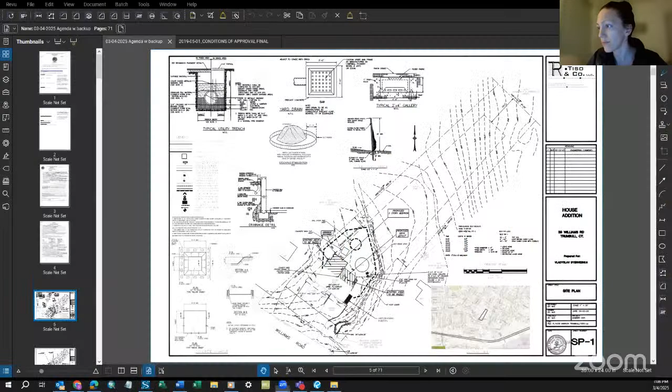Let me know if you can see it. Yeah, we can see it.

Basically, is there a watercourse? Is there wetlands? What are we dealing with here? The watercourse wraps around it. The addition is in the back of the house. As was stated, there's an existing deck. There's a line you can barely see, but it will be moved to the other side, and here is the proposed addition.

Please correct me if I'm wrong on anything. No, that's exactly as it is.

Go ahead, Tatiana. Yeah, we've issued engineering comments. They're really minor in nature, so I'm sure the engineer will address them prior to the next meeting. The only comment I wanted to highlight for the commission is that it would be beneficial if the driveway runoff was treated instead of the addition.

So the stormwater system is proposed in the back of the house. It is close to the watercourse, but roof runoff is clean, as we know, and driveway runoff - it would be beneficial if it went through the stormwater system instead of the addition. It is not a requirement, it's up to the applicant, but I just wanted to highlight that it would be beneficial for the wetlands.

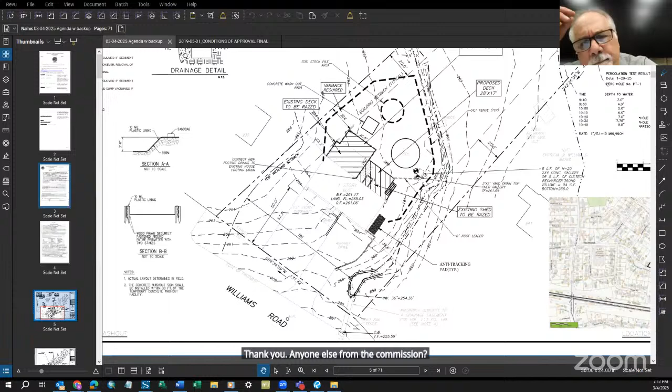Anyone else from the commission? Through the chair, go ahead Carmine. More of a question for Tatiana - there's just that one 6-inch roof leader. Is that just for the addition, or does he have to tie in the whole house to the Cultech? It says it's just for the addition.

They don't have to tie in the whole house. It's just the added impervious area that has to be routed to the stormwater system. Okay, thank you. Any other commissioners, any questions?

Okay John, I'm going to ask you to inform the applicant of what we'd like to have done for our walk, if you would.

John, are you with me? I'm sorry Richard, okay, I wasn't prepared for that. No problem, I thought you were talking about John Mayer. Yeah, so we haven't - I'm up, sorry, I forget we have the two Johns. Yeah, he's the talkative one, I forget.

So we haven't done any new construction, right? So we would probably like to get the corners of the building, or the addition, staked out. So if we could have at least 3 points on the back side of the house identified with stakes, I think that would suffice. I don't know if any other commissioners have any ideas on what else.

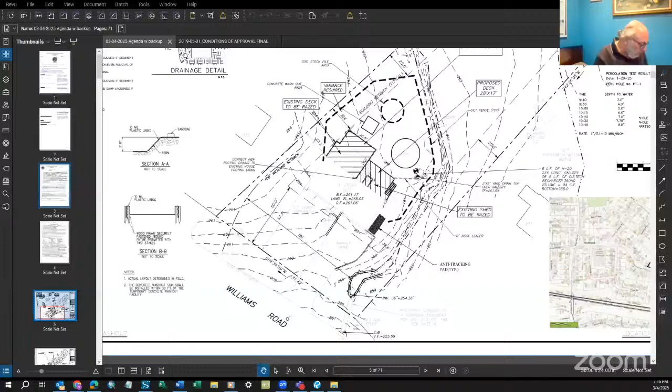Any other questions through the comments? Go ahead, Carmine. It's another technical question. In the drawings, there's a drawing C1 and C2, and they seem to be the same. Is there a difference in those?

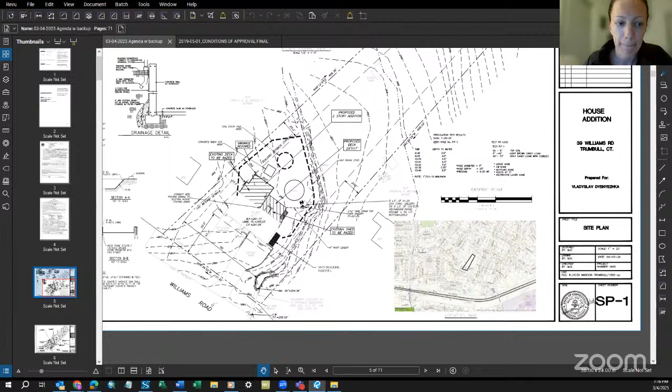C2 just depicts drainage area maps. This is really relevant for the drainage calculations report, so it wasn't necessary to include that. I would just concentrate on SP1. But C2 really depicts the information for the drainage calculations, so time of concentration, curve numbers, all that stuff we review as part of the stormwater system design.

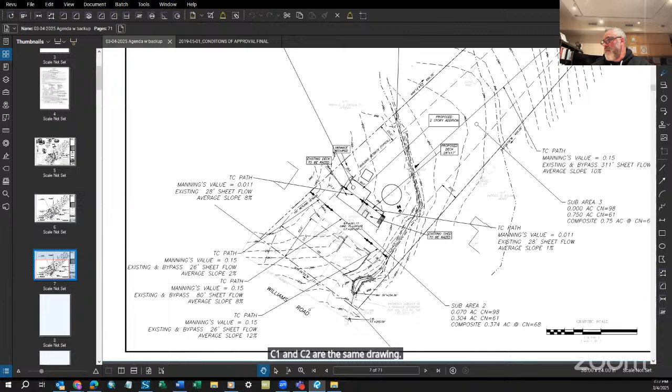So those calculations seem to be on both drawings? Yeah, it looks like both are the same. I agree. I don't see them on SP1, but on C1. C1 and C2 are the same drawing. It's in red, neither of those are required. So C1 and C2 are not necessary for the commission review, but they're the same drawing.

They're saying one should be for the proposed and one for existing conditions, so there should be a difference. I don't see it. The devil is in the details in areas and curve numbers — those are the only differences.

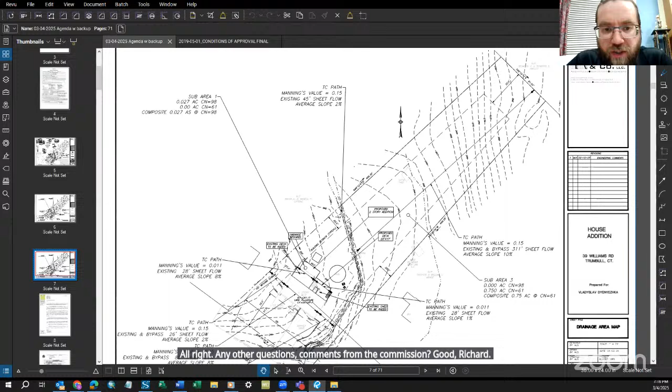Any other questions or comments from the commission? Go ahead, Richard. Just a question about the pool. I'm just looking at that, there's no...

Are there future alterations at this time to that pool? So the pool, we do not plan to do anything about it, meaning we're not going to expand or alter it in any way. It's just going to remain there as is. Okay, for the record, that was the applicant speaking.

Okay, so are we good? Any other comments, questions, anything else you want to ask the applicant before the next meeting? We're good? All right, I think that's it, sir.

We will notify you when we're going to be walking it, and we look forward to seeing you back on April 1st. I'm sorry, I said March, I meant April 1st. Sounds good, thank you for your time. I'm still looking at February on my calendar, but we've got you down for April 1st. All right, thank you, everyone.

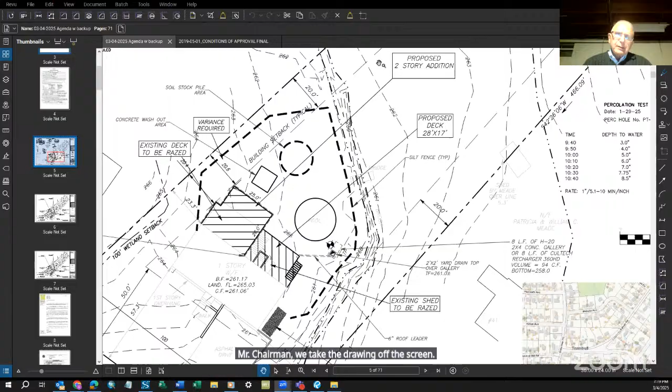25-04, Matt and Layla Freed. Permit approval to remove existing patios, walkways, steps to deck and fencing, and construct new pool, patios, walkways, fencing, planting, steps to deck and associated site improvements within a regulated area at 6 Vintage Road. I see Abigail is on the screen there.

Yep, that's me. When you get a moment, if you can introduce yourself and give us your company and all that good stuff. Okay, my name is Abigail Squants. I work for DeVore Associates and AMSD Landscape Architects, and I am going to be presenting for the Rock Spring Design Group, for the Freed property, number 6 Vintage Road in Trumbull, for their application. Is it okay if I share my screen and take you through what we're planning? Yes, thank you.

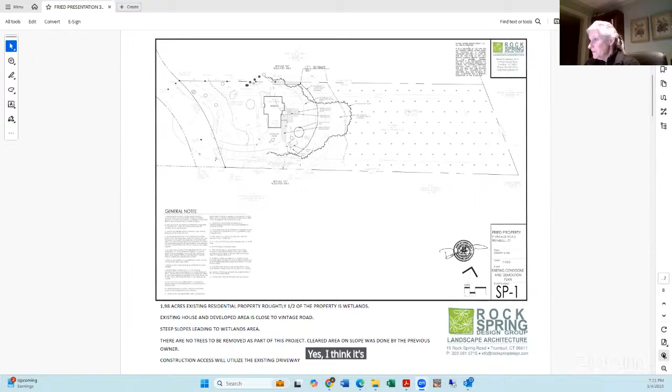Can everybody see that? Would you be able to blow it up a bit, it's kind of small. Yes, I would agree with you. Right, okay, so this is an overview of the property.

This is the existing conditions. It's a house on Vintage Road with an existing deck configuration now. Here is the driveway. Pertinent to the commission, over half of the property is in wetlands. This is the wetland delineation line right through here, the flagged wetland, and this is the 100-foot setback line, which you see also goes partially through the house.

I'd also like to bring to your attention the proposed silt fence for erosion control, which actually is halfway down the slope leading towards the wetlands. It is a very steep slope. This will also be the envelope for all of the disturbance on site.

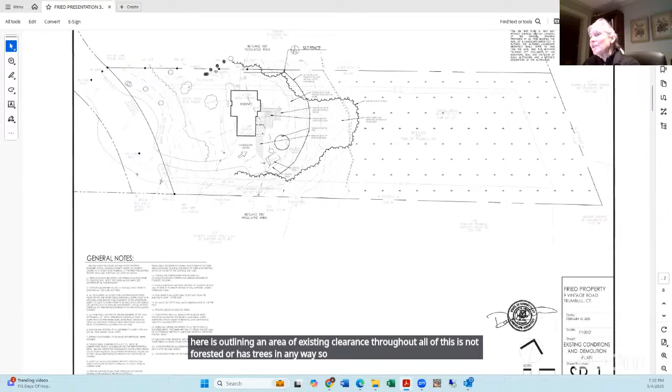Let me just go back a little bit. This bubbled line is outlining an area of existing clearance throughout. All of this is not forested or has trees in any way. So moving forward in the project, there are no trees within the envelope of the proposed work.

Back to the design. The overall design is a removal of part of the deck area, a series of walkways leading up to a small terrace, and then - I have to look at this because it's so small - a 14 by 28 foot proposed swimming pool.

Beyond the swimming pool, as a general point, halfway through the pool is where we actually have the shoulder of the hill going down towards the wetlands. So the pool is proposed to be partially elevated out of the ground, and attached to the edge of the pool there is a cantilevered deck. So no area below this within that wetland envelope would be disturbed because of the cantilevered deck.

We then have a series of additional walkways through here and a standalone hot tub. Above and beyond that, we have two L-shaped small freestanding retaining walls just to help close this area out.

Again, this is our flagged wetlands. This is our 100-foot setback. Also, we've proposed a variety of native plantings throughout to act as a buffer between all of the proposed and finished work leading down towards the wetland area.

And to help you understand the change in overall elevation on site, this is a section. I'm going to blow this up some more because this is particularly tough to see. This is the existing slope, the dashed line.

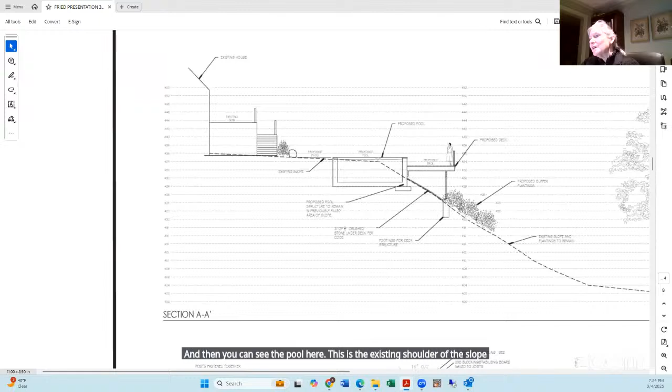And then you can see the pool here. This is the existing shoulder of the slope, which goes down. So the pool is built up and out and none of the grade is changed at all. The proposed deck is cantilevered out, and the only proposed disturbance within this area is a series of sono tubes to hold the deck up.

And then last but not least, I think we should all know that there's only 321 square feet of impervious increase on the property. This is the overall square footage of proposed work on site.

So it's a very nominal push out into this window. Are there any questions at this time?

All right, well here, let's view the pictures. Tatiana, do you have any comments?

I don't have much. I would really like to see the site, and thank you for providing pictures - it really adds a lot of information. The only thing I would note is that because of the steepness of the slope, I think a double silt fence would be more appropriate, or maybe silt fence reinforced with hay bales. Otherwise we'll just take a look at the site, and obviously the pool design would have to go through a structural engineer. Okay, that's all easily addressed.

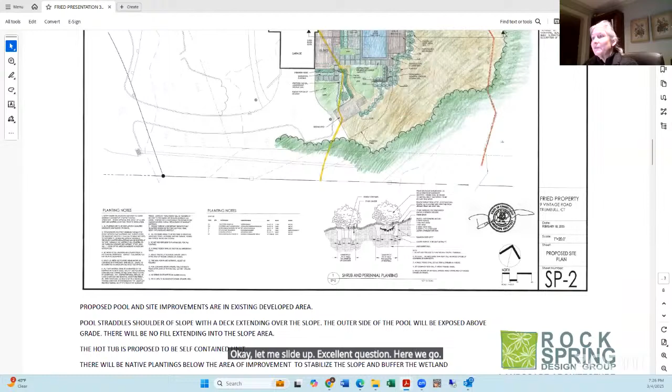Abigail asks, where's your pool equipment, by the way? Let me slide up - excellent question. Here we go. Oop, went too far, forgive me. Oh, I keep doing it. Okay, the proposed pool equipment is right here.

One thing I didn't mention is we're also going to have an in-ground propane tank proposed right here as well. And also that the pool fence picks up from the corner of the shed, wraps around and ties into the deck over here, then picks up over here and slides around and ties into the house over here. So this is the line of the proposed pool fence.

Let me blow that up a little bit for you. There you go.

All right, I'm going to ask the commission for questions and comments. Go ahead, John.

I'm a little concerned that half the pool is underground and half is exposed. I'd like to make sure the design is good so the side facing the wetlands doesn't break down over time, since it will face much more force than the protected sides. Of course, it would be structurally engineered, and we'd come back with that information as we move forward.

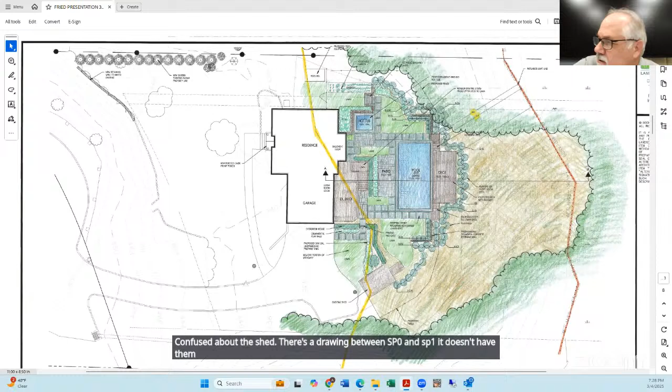Any other comments? Go ahead, Carmine. I'm a little confused about the shed. There's a drawing between SP0 and SP1 that doesn't have a marking on it. The shed seems to be running north to south.

In drawing SP1, it seems to be in a slightly different location and at an angle. This is an existing shed that's not being moved. Can you explain the difference? No, I cannot, because I don't actually have access to those drawings at this time, but we will come back to you with that answer.

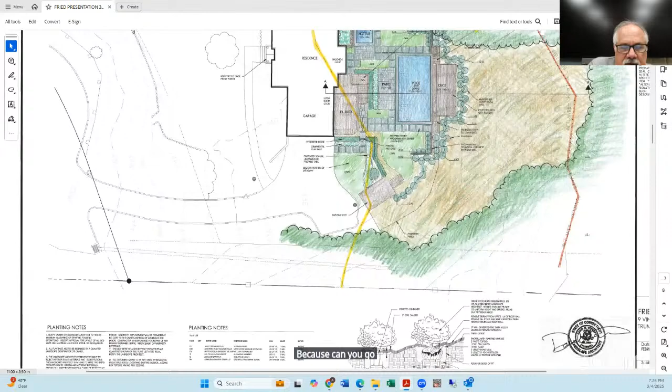Seems to be 90 degrees. I would need to check that. I'm sorry, it's a good question. I'll look into it, and if it needs to be rotated, we'll address that.

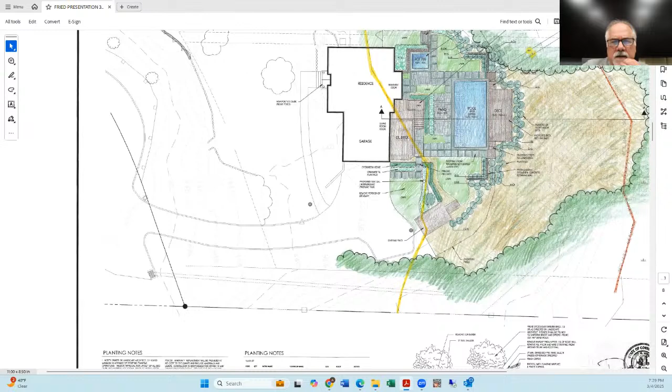Go ahead, Rich. Just a question about the backfill being used for the retaining wall. Is that being trucked in, or is it from the site itself? I think there's going to be very little excavation on site for the pool. We'd need to do a calculation once we get through permitting to figure that out, but if we needed to bring in material, it would of course be clean fill and then topsoil. Okay, thank you, and that calculation can be made moving forward.

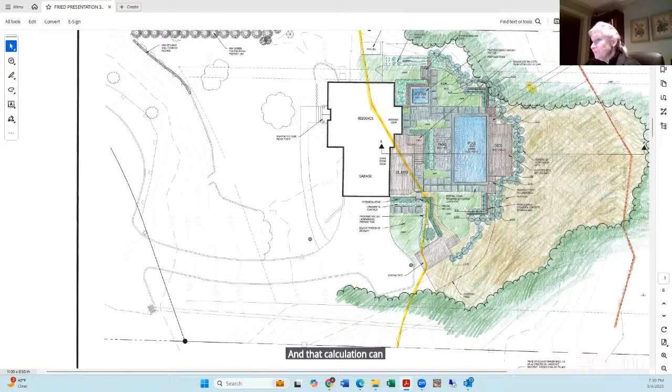Any other comments or questions? Okay, John, I'm going to ask you to stake out what the applicant should do for our walk. And if you would, lean forward, you're breaking up a little bit. This is a difficult one.

I guess all four corners of the pool. The hot tub? Can you hear me? Yeah, you're good. You said four corners of the pool. Should we do the hot tub too, or what else? I'd like to see the deck, which is on this drawing to the right of the pool, at least the two points furthest and closest to the wetlands. Yeah, we could do the hot tub. How big is the hot tub? Should we just put one stake here, or do we need all four?

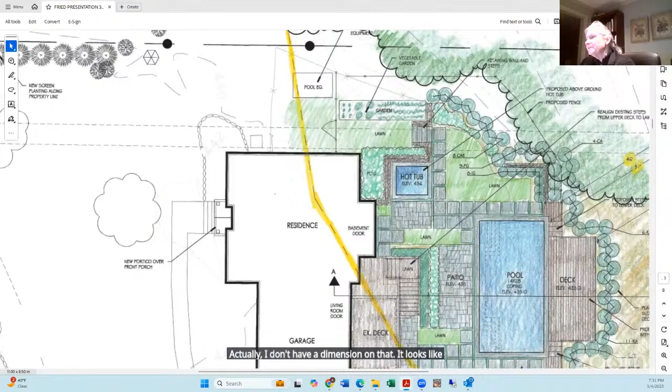I have to zoom in and see that. I'm sorry, actually I don't have a dimension on that. It looks like it's probably 5 by 5. I think if you just put one stake in the center of the hot tub, that's fine. We have existing decks, right? So we don't have to worry about any of that.

I think if we have those points laid out, we could find our way around. What do you think, Richard? Yeah, that's the main focal point on this, so it looks good.

Any other comments from the commission on what they want to see done for our walk? Good, Rich. Just one other question. I'm looking at the site plan requirements and the application. There's one thing I've never seen before. It says, question 10, that it's located in the watershed.

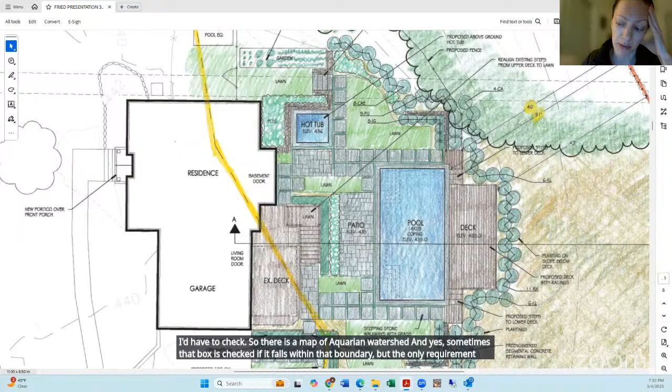Can you explain that, Tatiana? I'd have to check. There is a map of the Aquarian watershed, and yes, sometimes that box is checked if it falls within that boundary, but the only requirement for the applicant and the town is to notify Aquarian of the pendency of this application. It's really up to them to evaluate any impacts within their watershed.

So it doesn't require any type of evaluation from them, just notice from us. Do we need a letter for our file from Aquarian? I'll check if that was mailed, but we only keep a certified mailing proof that it was sent out; we almost never get any correspondence back from Aquarian. It says section 8.3 — that must just be saying to write the letter.

Okay, all right, that's all. Nice. Okay, any other comments or questions?

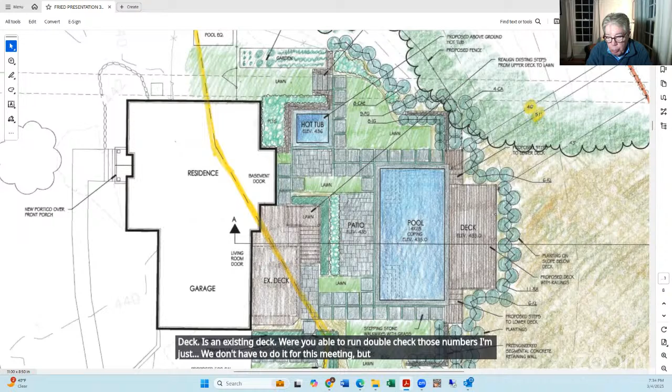Through the chair, this is Greg. Yeah, Tatiana, I'm assuming we'll look at the numbers, but looking at the print that's up, it looks like there's a lot more impervious coverage than we're saying we don't need any retention of stormwater. But I guess a lot of it is just pool deck. There's an existing deck. Were you able to double check those numbers?

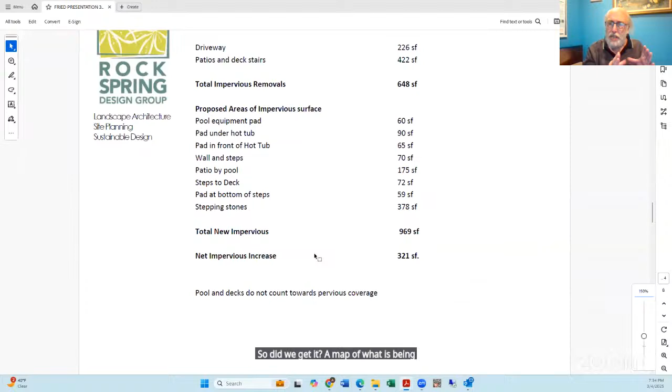Go ahead, John. Yeah, just a comment on Greg's question there. With all these pavers and deck stuff, are they really being considered as impervious surface? Because the pavers have cracks in between them, a lot of times they're not counted. All these stepping stones have cracks in between them, they're not counted. So did we get maybe a map of what is being considered in the impervious calculation and what is not being considered in the new things that are being added in the plan?

It's Abigail again. Just a quick note that I did skip over this page, but this was a breakdown of all of the coverage that had been proposed, including the steps to the deck, and the stepping stones was 378 square feet. So the total new impervious was 969 square feet. So the net impervious increase was 321 square feet, if that helps you in any way at this time.

Okay, now the deck, for example, that's not included in there, right? I'm sorry if that you broke up a little bit. I'm sorry, the deck itself, that's not included as impervious surface, right? It shouldn't be, no, if the water goes right through it, yes. Yeah, well, that might be some of what Greg's looking at too when he's seeing the deck and seeing a lot of areas. So we can discuss that at the next meeting.

But maybe that helps. Quick question, Greg? Go ahead, Greg. You're showing the patio by the pool at 175 square feet.

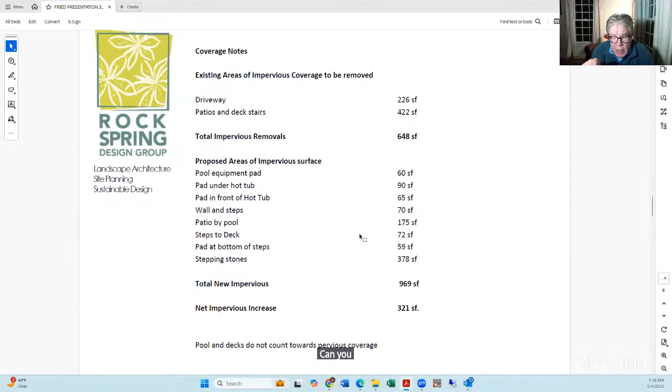Can you go back to your print? I thought it was showing 450. Okay, hold on, the one by the pool? Okay, hold on a second. I need to zoom in on this as well. My memory is not all it should be.

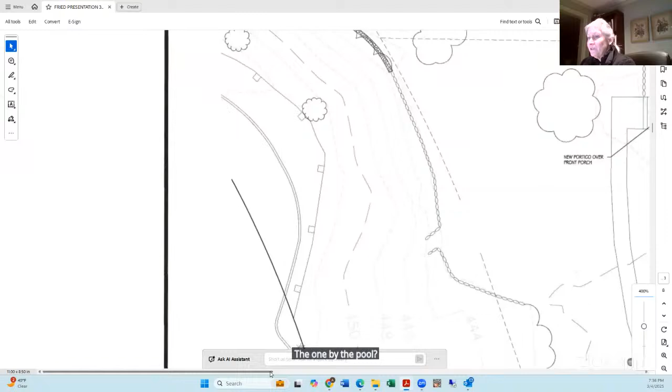So I think the patio by the pool, it says 450, that's elevation. Elevation, okay, elevation 400, and I think it says 35. Again, I would need to, yeah, 435. All right, yeah, and I know 435. And I know you removed part of the driveway, which is where you're getting some gain. Yes, in this area through here, this has been pulled back.

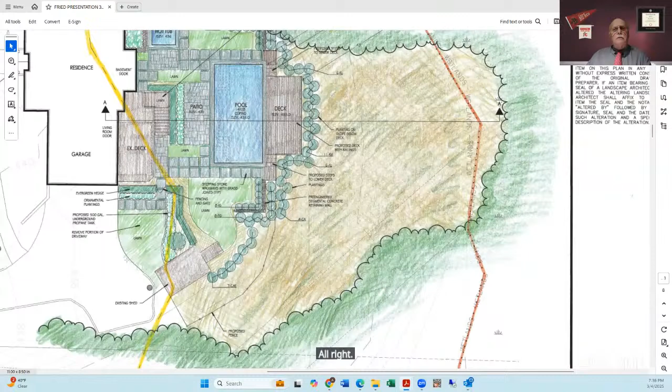Okay, all right, Tatiana will double check the numbers, I guess. All right, any other comments, questions? Nope, I think we're good. Hold on then. Through the chair, go ahead, Carmine, you snuck in.

Scaling that patio, it's slightly more than 20 feet by 40 feet shown, by scaling it. The pool's only 14 by 28. Then the scale is probably wrong. That's a possibility.

The drawing says it's a 20 scale. I think it's probably 10. Let me, if you wouldn't mind, we can check that and get back to you before you guys go on your site walk. I'm like 99.9% sure this is a 10 scale drawing.

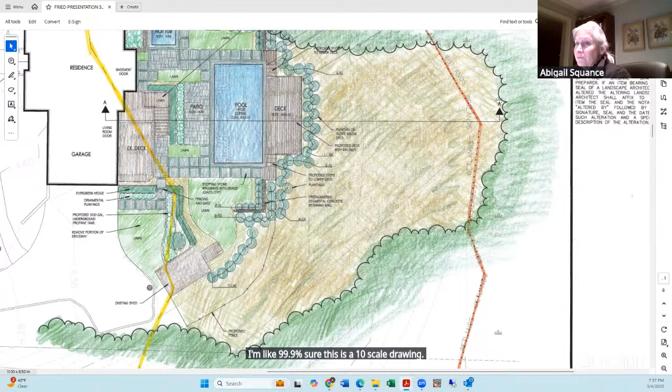Right, if you could, when we do our walk, we've asked for the four points of the pool, give us the two corners of the patio as well, so when we're out there we can sort of gauge it. All right? Is there anything else? We're good?

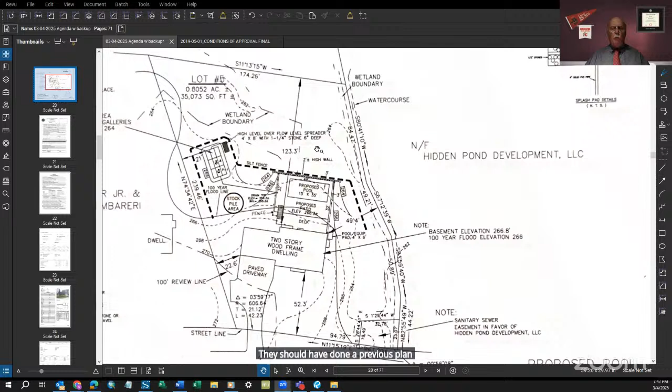This is John Mayer for the record. We are still reviewing the drainage plan. It's mostly minor comments that we can handle with the engineer. Two comments pertain to wetlands: they don't show the trees being removed—they showed it on a previous plan, but not on this one. Additionally, they might want to consider trying to increase the setback from the wetlands to the limits of disturbance.

You can kind of see the back of the retaining wall at the back of the pool pretty much brushes up right against the existing wetlands boundaries, so they might want to explore some options on that.

I have a question about that. So I had spoken to them about the retaining wall, and they said that they can shorten it, but I'm not sure which way.

I think the way they were thinking of shortening it is basically where you drew that line—from there over to the left would be a retaining wall, and the area to the right of that blue line would be where whatever is removed from the pool would go to fill. That was another option if we didn't want to do a retaining wall all the way across. I'm not sure which is the better option. I'd prefer less retaining wall, but I'm not sure what our options are.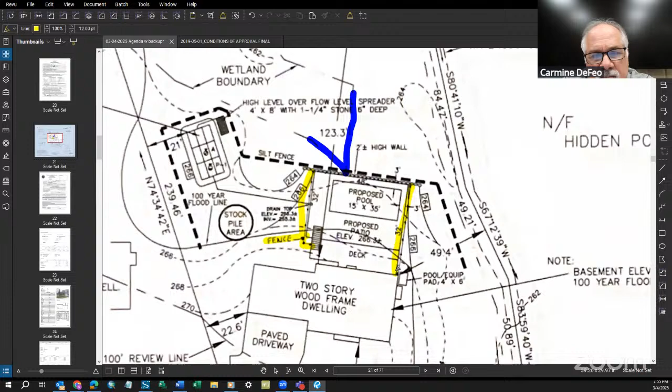Tatiana, a question for you. How is this being determined that this is actually where the wetlands are? Is this from the prior 2003 data? Because I believe this was the Fracker development when they did the 5 houses back in the Beaverbrook development. That's where the wetland boundary came from.

Is there a way of marking that at all, that we can see where that is so when we go out we've got an idea? They would have to have a surveyor come out and put flags. Yeah, they could do it using the old boundary.

The question is, is the commission okay with using 2003 data? I mean, the other option would be to have the wetlands reflagged by a soil scientist.

Go ahead, ma'am. I believe a soil scientist — I'm not sure on the date if it was before or after 2003 — did some soil testing. Whoever I originally spoke to a while back had found that information and sent it to me. Somebody at town hall, I'm not sure if it was John Mayer or who I spoke to.

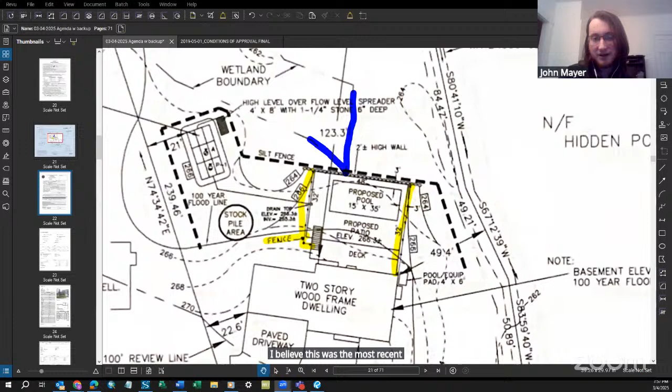And the soil scientist actually determined there was less wetlands than previously thought. So I'm not sure the timeline, but I know that had been done at some point. I'm not sure if it's information you guys have. I believe this was the most recent delineation we have on file. The 2003? Yes. Okay.

All right, well Chair, how do we want to go about getting this wetlands delineated, given its extreme close proximity to the proposed project? Well, what I'm wondering is, seeing that it's supposedly a straight line all the way across, if we could get the right point and the left point, if you know what I'm saying.

This would be like a surveyor going out and giving you certain marks. So right now, how are we determining the actual wetlands boundary on this? That's the issue we have.

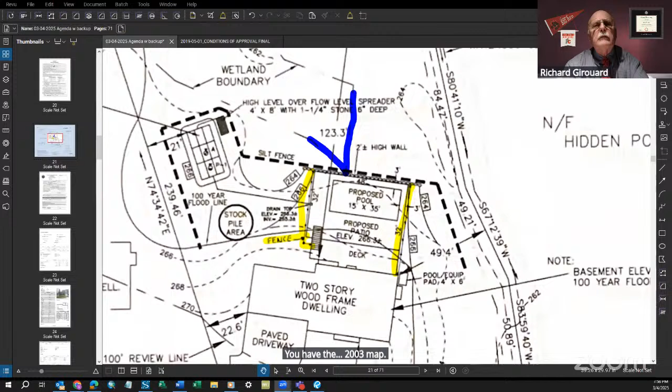You have the 2003 map, right, John Mayer? Yes. All right, do you feel that when we're walking this, you'd be able to give us an idea of where it actually is on the property here?

Through the chair, go ahead Tatiana. Yeah, I think it's typically up to the applicant to kind of show it. I don't know if staff will be able to figure out where the wetland boundary is. This is the currently depicted wetlands area, and in terms of how it can be shown on the site, the staff can't make that up.

Because I remember when Fracker did this, there was wetlands all the way across all 5 houses. This was the worst one of mine. All right, well let's do the walk and then we'll determine whether we want to see a wetlands scientist out there to determine where it is.

All right, so John — through the chair — go ahead Tatiana. Yeah, I mean I don't know how the timeline is for the applicant. Sometimes it's better to let them know what the requirements are beforehand, because if we walk it in a couple of weeks and determine they do need it, they won't have time to provide it for the April meeting. So as long as the applicant is comfortable with potentially going to the May meeting, that's fine, but it may be more beneficial for them to save time and get an answer tonight. Just my 2 cents. I appreciate that.

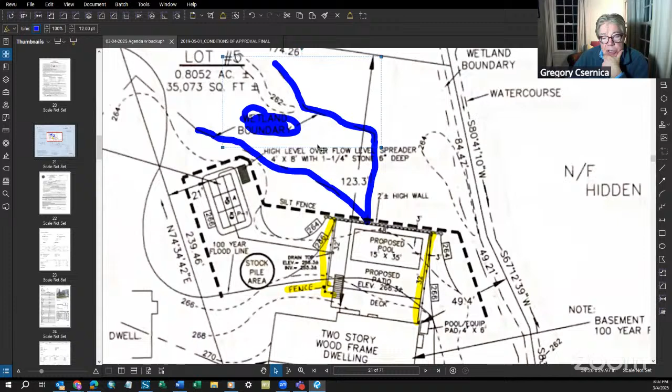Through the chair, Greg, go ahead. For the applicants, I would go back to whoever you're working with designing this, and maybe it's something you'd consider the better alternative. If you can adjust your stairs - are those existing stairs off your deck? They are. It might be the cheaper thing long term if you can adjust your stairs and pull that pool back toward the house.

I don't know if you're willing to do that. You talked about early on that the concrete patio was bigger than you really wanted. But if you could pull that whole thing back, that might solve a lot of issues if you can pull it back several feet.

I don't know what the rest of the commissioners think. Obviously we'd love to know the corner of where this V on the wetlands is sitting, but it would give you a little more room, and you could do plantings as a buffer. The wall won't be right on the edge.

So if we're able to move the pool back, how many feet back from the wetlands boundary would that be?

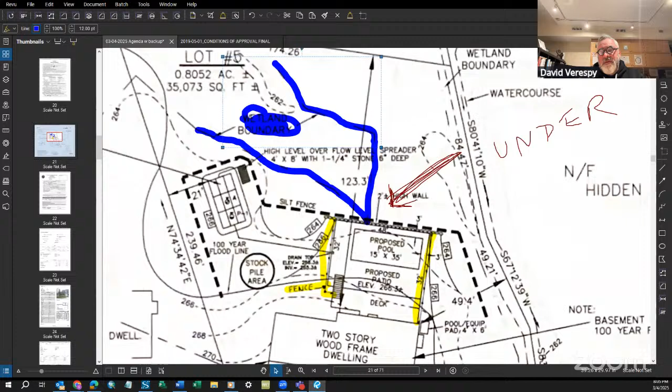I was just asking Trevor where the shortened wall would fall on the alternate plan, and I was wondering where that fell, but he thinks it's still close to that V, where the wetlands comes down.

Okay, so do we have the ability to move it over to the right? Would that solve it? My thoughts are if you came in 5 feet and moved over to the right to give a little more clearance with your steps, I think that might solve it.

What do you think, David? I'm not going to get into redesigning their project for them online. There's a lot of moving parts here - there are different orientations, you could flip the pool 90 degrees and move it to the left or right, and you would have more space. But they've put the pool right where the deepest part of that wetland is coming in.

This is one where I would say we'd love to see an alternate. That's not going to do much for you because your wall is still going to be in the same location.

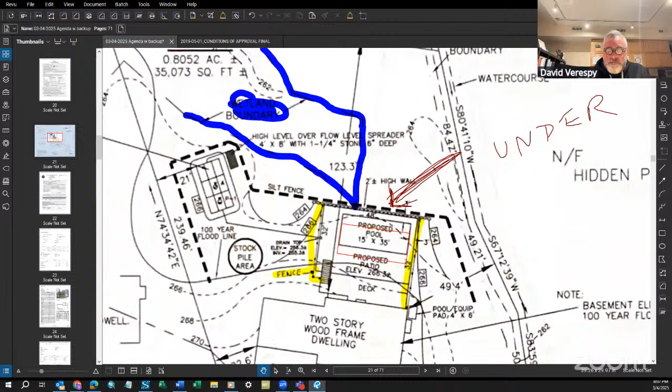All right, well, you want to talk to your pool contractor, and like I said, right now, if you could move it in so you're at least about 5 feet away from the point of the wetlands, I think that would kind of alleviate the problem for you a bit.

All right, any other thoughts, questions from the commission? So John, we gave him the original 4 points, and then we could ask that they do the revised 4 corners if they moved it in 5 feet, right?

That sounds good. Do you want to put both of them in? Well, let's see what the difference is, and then also you have to make sure the trees you're proposing to take down are marked. Put ribbons around them.

So let's go back to, we'll stake and tag them. Which do we want to have stake? I would prefer to stake just what we have on the plan. And then after we see what was proposed on the plan, if we want to move it back, we know what we're doing. It gets kind of confusing if we have all that stake stuff.

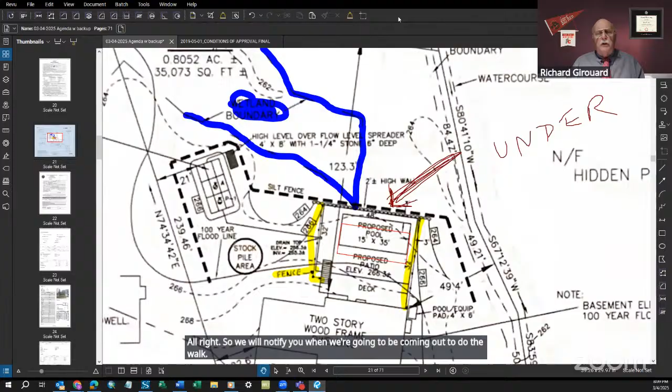All right, any other comments, questions? All right, so we will notify you when we're going to be coming out to do the walk. And in the meantime, you might want to do a little bit more research on the wetlands flagging and all that. And as John Mayer, you weren't able to find out who did it originally?

Was it Bill Kenny who did the 2003 wetlands delineation? No, it was done by Cynthia Rabinowitz of Consoil. I don't think she's working anymore. That was not the plan either. Remember, Richard, I had the Rabinowitz plan, and then there was another plan that was after.

Or maybe I'm thinking about Hidden Pond. It was a Rabinowitz plan for Hidden Pond. There were three soil scientists that worked on Hidden Pond, and none of them agreed with each other. I know, okay, I just want to remind you about that. Not on this particular one. Well, you had the Hidden Pond development right next to you as well, so it gets a little fuzzy. So I might have misspoke there.

I don't know if I'm correct to suggest this, but you might want to reach out to James Fracker, who did the original 5 houses, and he might be able to tell you who flagged it and give you a hand on that. All right, okay, are we good?

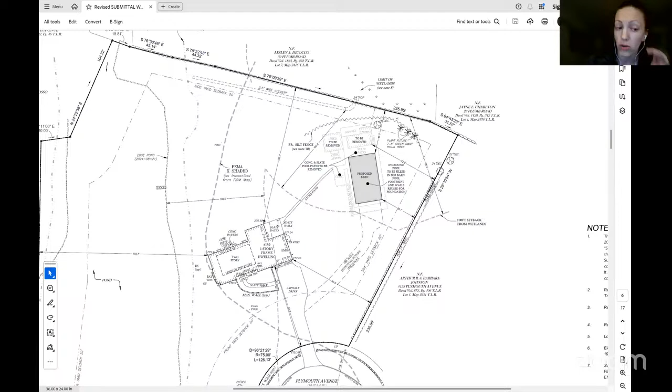We'll make a modification to the calculation with a note of the size of the existing concrete pool. Is that okay? Sure, that's what we're looking for, to remove the pool from the existing impervious area calculations. Kind of crazy to me, but we'll do what you want.

Through the chair, go ahead, Carmine. The proposed future driveway, is that included in the impervious calculations? Yes. Thank you.

It shows, Commissioner DeFeo, about 1,600 feet in the calculations.

All right, any other comments, questions? All right, so if that's the case, then I'm going to ask for a motion to make this a public hearing. Do me a favor, Tatiana, or Attorney Russo, if you can take this off the screen.

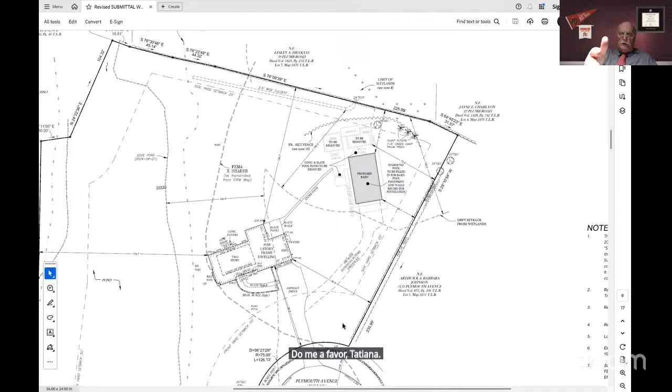Thank you. Through the chair, go ahead. I'd like to make a motion to make this application for Plymouth Ave a public hearing based on the petition that was submitted to the Inland Wetlands Watercourses Agency. Thank you, I need a second. Seconded by Rich. All in favor? Aye. Okay, it's unanimous.

I'm just going to clarify that the public hearing is our next regularly scheduled meeting, which is April 1st. April 1st. All right, April 1st, April Fool's Day. Perfect place to be.

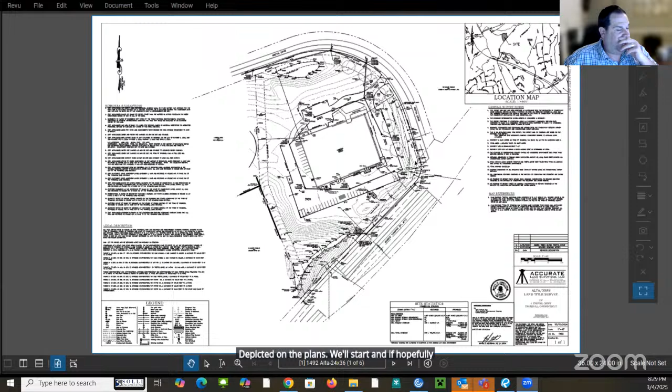We'll start, hopefully everyone can see my plan set on the share screen. I believe we were asked by the commission to depict the location of the trees along Trefoil Drive, the individual trees, where they're located, species, and make a note on our landscape plan of what's to remain and what's to be removed.

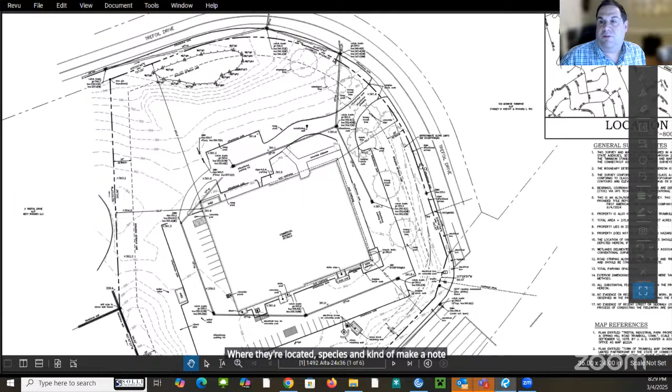So we did add those 7 trees along Trefoil Drive. There are 4 honey locust, 1 red maple, and 2 sweet gums as you come around the bend on Trefoil Drive. Those have been added to the survey, and we'll get into the landscape plan in more detail, but 6 of the 7 will be removed as a result of grading and parking lot expansion necessary to accommodate the proposed site layout.

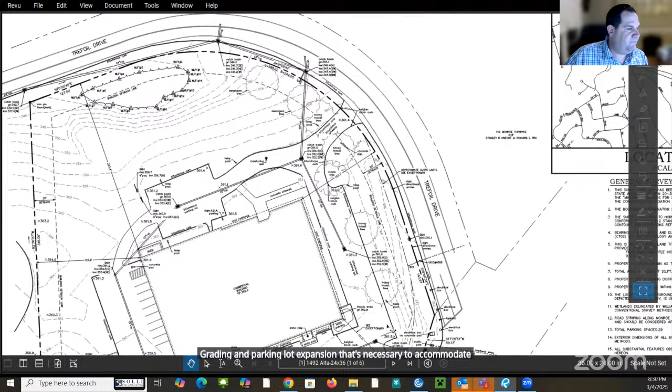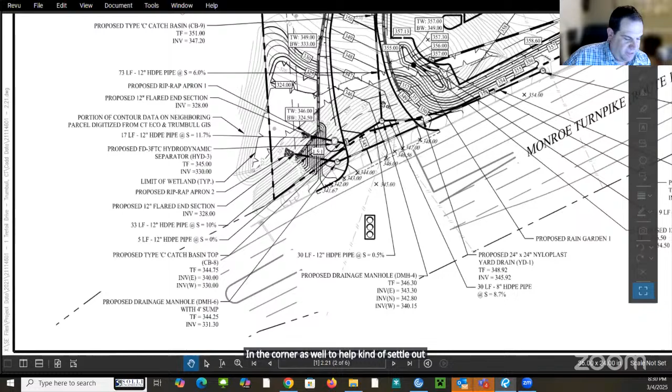In terms of the grading and drainage plan, Tatiana asked we show a couple access manholes for cleaning and inspections. Those have been added to the underground detention infiltration system in the northeast corner. We did add a note for a 4-foot sump at manhole 6 in the corner as well, to help settle out the solids before getting into the wetland there. We also provided some revised grading to this wetland area to provide additional separation from the retaining wall, eliminating hydrostatic pressure and water-related issues to the retaining wall there.

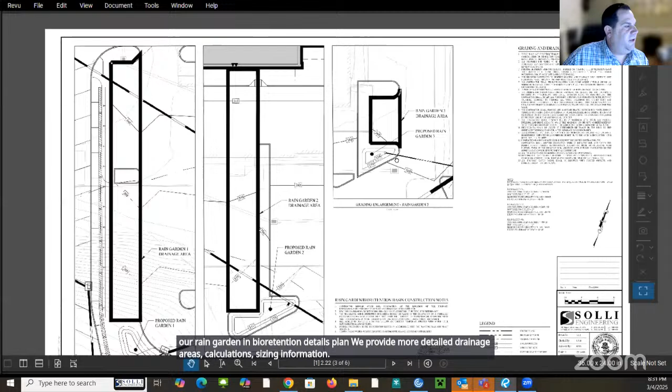In concert with that, we actually created a new plan, which we're calling our rain garden and bioretention details plan. We provide more detailed drainage areas, calculations, sizing information, and contour data for all these individual rain garden areas, along with bioretention rain garden area notes and specifications for what the media should be from surface level down to the piping to help drain it out at the bottom of the system, and some construction notes taken from guidance provided in the stormwater quality manual.

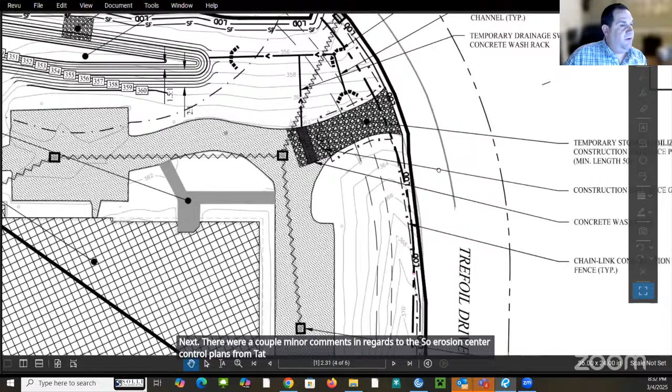Next, there were a couple minor comments regarding the soil erosion sediment control plans from Tatiana. She asked that we show a concrete washdown area, so we added a concrete wash rack with a swale that leads to our temporary sediment trap, and we also added a detail for the concrete wash rack on our soil erosion sheets. Also added a note that there's no stumps or debris to be buried on the site; they need to be removed as part of construction.

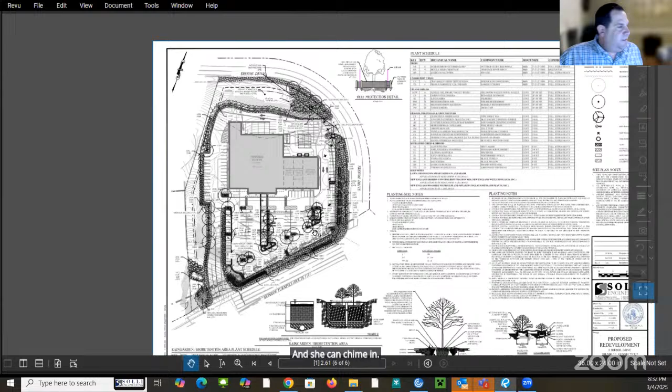Lastly, I will cover this at a high level, and Mary is on and can chime in if there's anything specific. For the landscape plan, we did revise the plantings around bioretention area #1 to follow the new contours in this area.

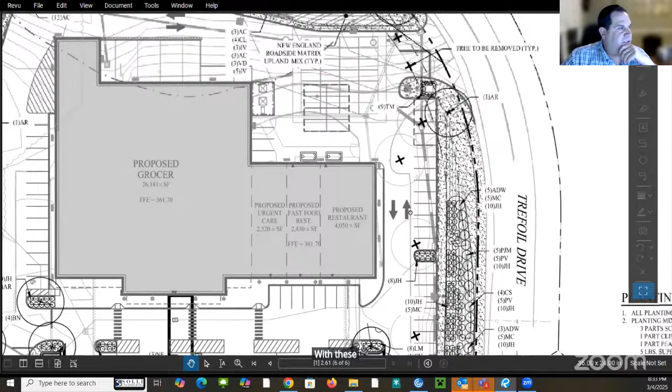More importantly, based on the commission comments, we are showing with bold X's those 6 trees to be removed along Trefoil Drive, and noting that they are to be replaced along Trefoil with 3 red maples and 3 pin oaks. 2 over here where there's ability to provide where the slopes are not so steep, and then another 4 around the bend. So we're placing those 6 in kind along Trefoil Drive.

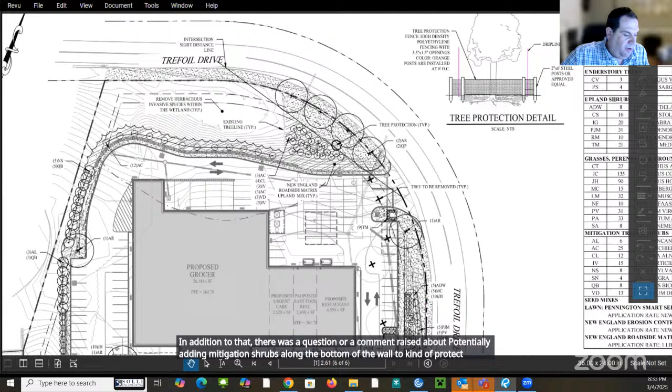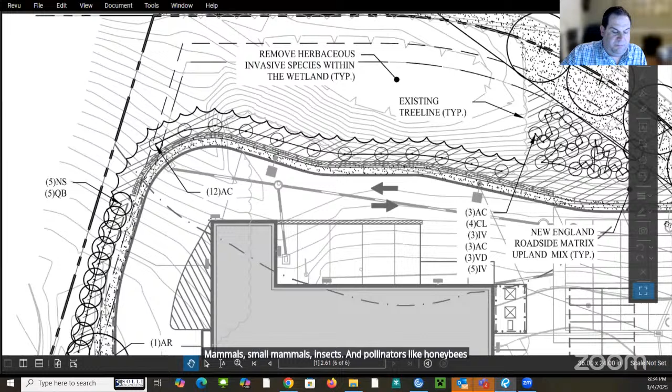In addition, there was a question raised about potentially adding mitigation shrubs along the bottom of the wall to protect that wetlands area and also break up the facade of the wall. So we did provide 12 shadblow serviceberries. They will help; they're a larger type of shrub that can be installed on these steeper slopes. You can see the contours are fairly steep here under existing conditions. They will provide some screening to break up the mass of that wall. But in terms of function, they are a source of food for birds, mammals, small mammals, insects, and pollinators like honeybees. They bloom in early spring to help with that pollinator function, and they also serve as a host for butterfly larvae, which is appropriate given the close proximity to the wetland system on the north side of the site.

That's a summary of the plan changes we submitted. We also submitted a revised operation and maintenance manual. There were some minor changes to references in the manual that Tatiana wanted us to correct, and we noted that the wetland system in the rear is to remain in its existing state and should be maintained as a wetland rather than as a stormwater pond. So we updated the notes accordingly.

We also provided some documentation per Tatiana's request showing that the pipes we are proposing in the driveway areas are rated for H20 loading for large-scale trucks, even though they're plastic piping. So there shouldn't be any concern with the ability for those pipes to support the proposed weights that will be sustained with truck traffic throughout the site.

I wanted to get into a question from the commission, which I believe was more directed towards staff, but we did want to try to at least opine, even though we can't necessarily physically quantify the salting impacts. We did provide this in our response to comments.

While we can't quantify an amount of salt going to the wetlands or stormwater system on site, we would note, as we have several times in the past, there is no formal stormwater quality mechanism or treatment system on the site. It's simply a collection system. Everything within the paved areas and the roof flows to Trefoil Drive without any stormwater quality treatment.

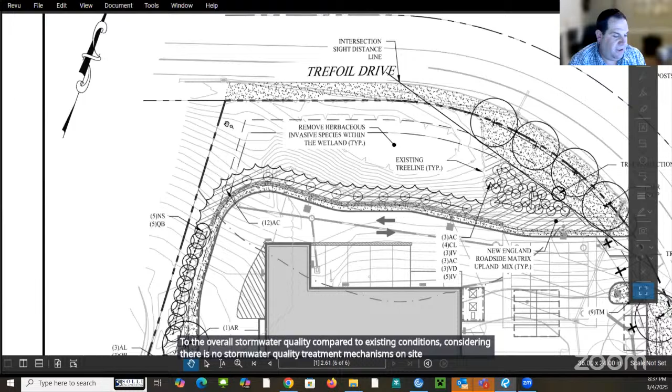The northern wetland in particular does not receive any direct runoff from any paved surfaces under existing or proposed conditions. So we think salting impacts to this system would be minimal because it's not receiving any runoff from parking lot areas or paved areas.

However, the wetland system in the southeast corner of the site does receive runoff primarily, in the existing condition, from Route 111. It has not been the state's practice, at least in the past, to provide stormwater quality treatment within the right of way.

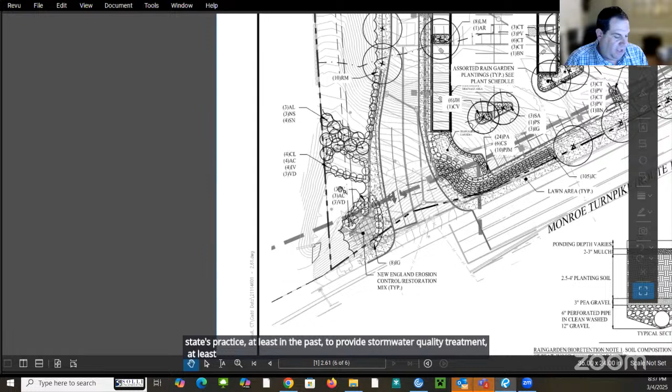So we've noted in our response to comments that it would be a significant improvement to the quality of the water flowing to this wetland if the state were agreeable to allowing us to provide a hydrodynamic separator to treat the runoff from Route 111.

I cannot myself agree to that. The site is subject to a right to drain under the Connecticut DOT's jurisdiction, so any changes to that system from Monroe Turnpike to the outflow into the pond would have to be reviewed and approved by the Connecticut DOT District 3 office. We're happy to have Tatiana involved in those conversations as well, to see if they would be agreeable to letting us do that offsite treatment to help further improve runoff quality to those wetlands.

In regards to some of the other high-level engineering comments, John touched on a lot of this, but some additional information we will submit. We just can't submit it currently while the site is active or we haven't received planning and zoning approval.

We'll supply perc testing info for the rain gardens, more detailed specifications, and how we will account for unsuitable soils or replacement of soils to make sure percolation can occur.

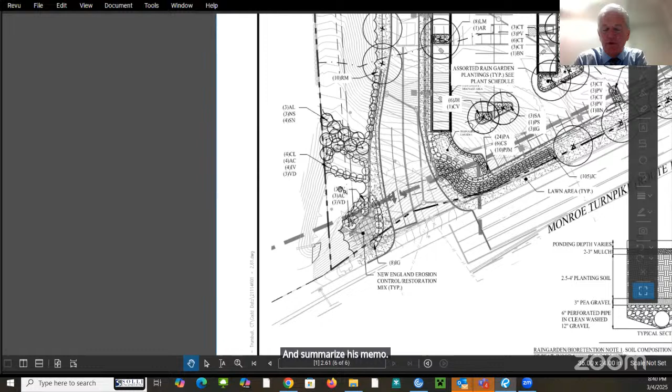Hey, I'm going to interrupt for one second before Bill goes. I want to be very, very clear to the commission: we are happy to accept a condition of approval that requires us to diligently pursue the stormwater treatment of the runoff coming off Route 111. As Luke said, it's very unusual for the state to allow that, but we will do our level best. You know where to find all of us representing the applicant here, and Tatiana knows us, you all know us, and however you want to memorialize that as a condition of approval, we'll do that. We just can't agree to guarantee it, because the state has the ultimate say.

But we will make the request. We will include Tatiana in those conversations. We'll do our level best to convince them, and hopefully they'll allow us to do that. So however you want to phrase such a condition, we will happily accept it. With that, let me turn it over to...

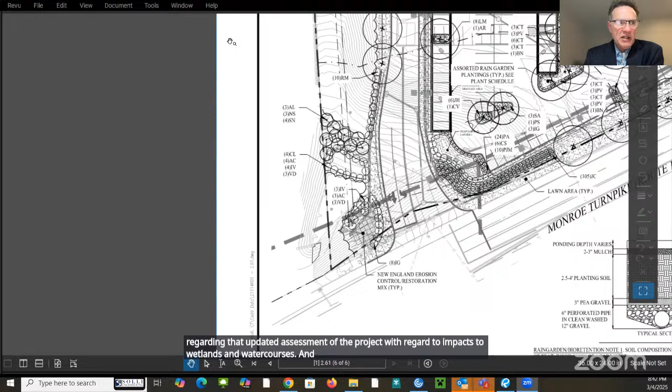More recently, we took a review of recent comments, suggestions, and changes related to the project and issued a letter dated February 20th regarding that updated assessment of the project with regard to impacts to wetlands and watercourses. I particularly want to focus on the wetland and watercourse area in the southwest corner of the property where the new entry drive is proposed.

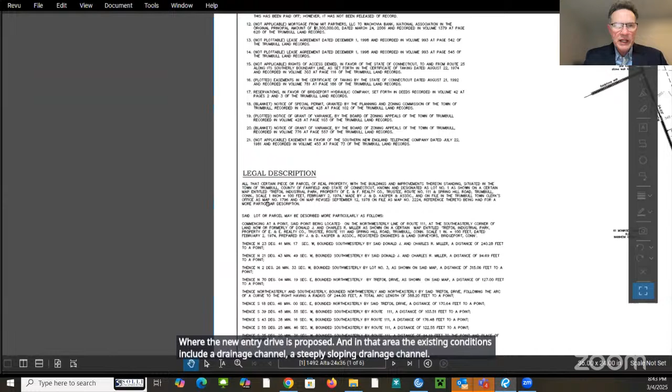In that area, the existing conditions include a drainage channel, a steeply sloping drainage channel, as well as a small pocket of wetland at the lower end of that. That system really is two different pieces and they function differently. The drainage channel slopes down steeply.

It primarily only conveys surface water, and the surface water that it conveys is stormwater runoff from the street. As has been discussed, it's water that is not treated. The channel is mostly rock lined. There's vegetation around it, but in the channel itself, not much vegetation. Because it's so steep, the water that flows through doesn't have a lot of opportunity to infiltrate into the ground. So its primary function is to convey stormwater for a short period of time during and after a storm. It does not convey groundwater or provide significant habitat for flora or fauna.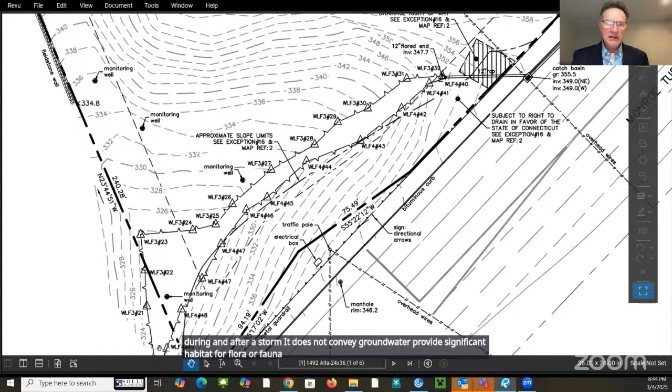At the western end of that is this small pocket of wetland. And it's interesting, that wetland has functioned, because of Route 111, sort of as a sediment trap. It's collected a lot of sediment over many years, and it's a small little basin. You could see the fill from the road on one side and the fill from the neighbor on the left. So that water gets directed to that from the drainage channel, and then it slowly makes its way through there and then exits immediately just beyond the property line into another culvert.

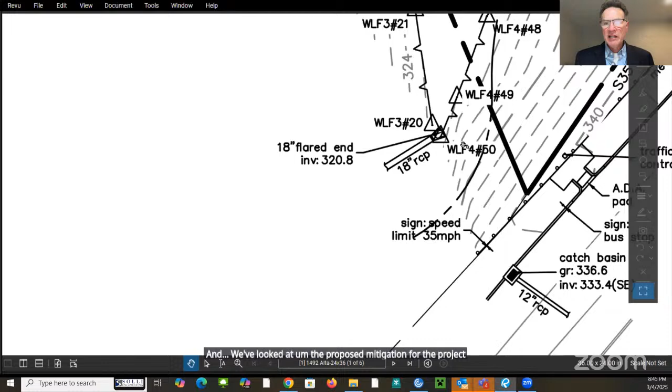So this is an isolated system where water comes in from a street culvert and exits via another culvert. We looked at the proposed mitigation for the project, and mitigation is being proposed because the project calls for eliminating that drainage ditch. The drainage ditch portion would be eliminated, but the pocket wetland remains. However, its primary function will be maintained because instead of the water flowing through that steep stone ditch, it will now flow through a pipe.

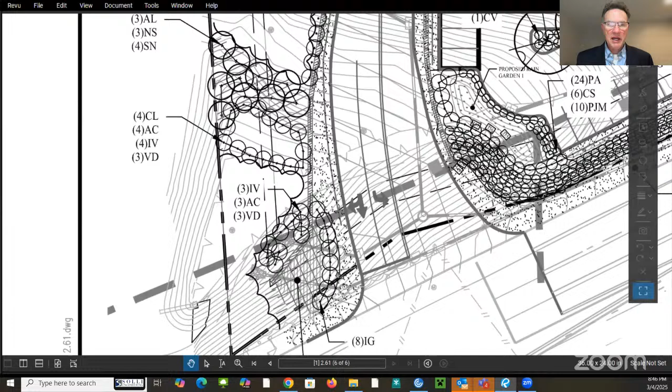And I strongly support introducing a Vortechnics type unit to collect and treat stormwater from the road. If we can convince the DOT to do that, I think that would be great, because the pollutants that come into this system today certainly are having an impact on that wetland from that street.

So, to mitigate for about 1,450 square feet of drainage ditch being removed, we are proposing to expand the wetland in this area by about 500 square feet. And I think it's important to know that that wetland will function at a much different level than the drainage ditch. It will provide and hold water for a much longer duration of time. It'll be planted and vegetated with native plants, so it will really help to support native flora and fauna in a way that the ditch is not able to do.

Because it'll be a flat basin type system, just by that nature, it has higher wetland functions, like by holding back water it helps to prevent downstream flooding. By holding back water, it gives an opportunity to clean the water. And by holding back water and allowing it to just sit in the shallow basin, it provides opportunities for wildlife to use it and so on. So it functions at a much higher level than the drainage ditch itself.

And then when you combine those activities with all of the stormwater management that's being proposed on site, I do conclude that the project will be a net benefit to the wetlands and watercourses on the site.

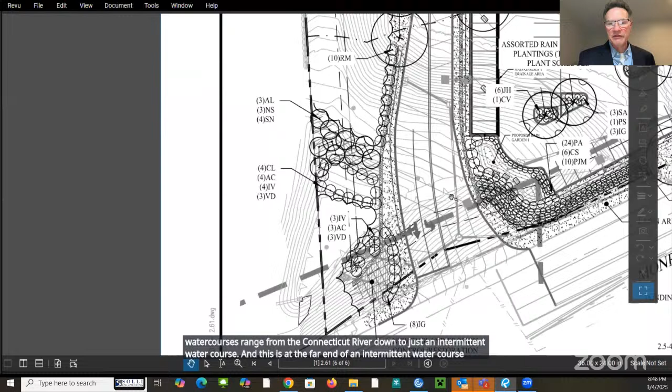That existing ditch is really barely a regulated feature. You think of watercourses ranging from the Connecticut River down to just an intermittent watercourse, and this is at the far end of an intermittent watercourse - it's almost not a regulated feature. So the new wetland will be a much higher functioning wetland resource, and with all the stormwater improvements on site, considering there are no stormwater management measures on the existing site, it's a significant improvement for the property.

That being said, the applicant is proposing, and information has been submitted to you about, the potential to do additional mitigation offsite. That's at the park - I forget the name of the park. Along the Pequonnock River. There you have a significant river right there.

Proposing about 4,000 square feet to create a new wetland offsite there, and that is going to be a really great addition. During low flows, when the river's just flowing within its banks, there's a public parking lot there for the park, and quite substantially, almost all the stormwater runoff from a large area of that parking lot flows through the area where this wetland is proposed. So this wetland will help to collect that water, clean it, cool it, and before it's released to the river, it'll have an opportunity to be substantially improved and help to protect the river in a way it's not necessarily getting protected today without that wetland in that location.

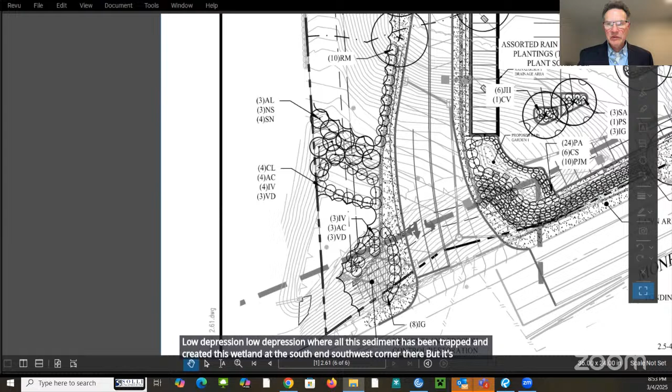I think it primarily exists as a result of other activities. There may have been something here, it's hard to tell, but that channel seems to me to be pretty much 100% man-made. Then they ended up with the development on the property adjacent, and that development became like a dam, so it created this low depression where all this sediment has been trapped and created this wetland at the southwest corner there. There's a chance there was some naturally occurring wetland conditions there, but I think it's driven today primarily by man-made features and drainage conveyance.

Okay, thank you. Hey Bill, question as to all the salt that comes off that road - is it realistically possible that that can grow anything with the amount of salt that comes off of there? Yes. You're saying basically it's a rock foundation and there's nothing growing in it, right?

There is some vegetation growing. It's mostly, I believe, having difficulty getting vegetation growing because of sediment loads that come in - the water is either depositing new sediment during some storms or eroding it away during other storms. So plants have trouble getting an opportunity to get rooted - they start to root, and then a storm event happens and uproots them, so they're either getting buried with sediment or getting scoured away with a larger storm event in that lower pocket area.

All right, questions for Mr. Kenny?

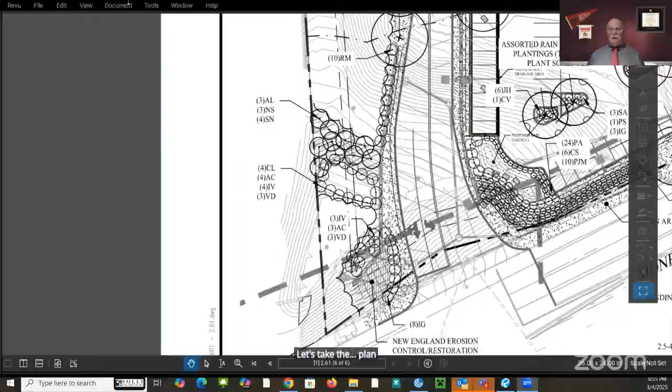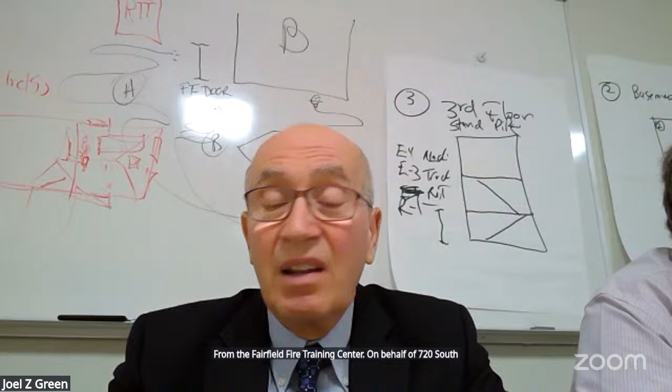Good evening, Mr. Chairman and members of the commission. Once again, my name is Joel Green. I practice law in Bridgeport, law offices of Green and Gross. I appear before you from the Fairfield Fire Training Center on behalf of 720 South LLC and Old Mine Associates, the interveners and abutting and proximate property owners. I am actually taking a brief recess from a zoning commission meeting, so we will be brief this evening.

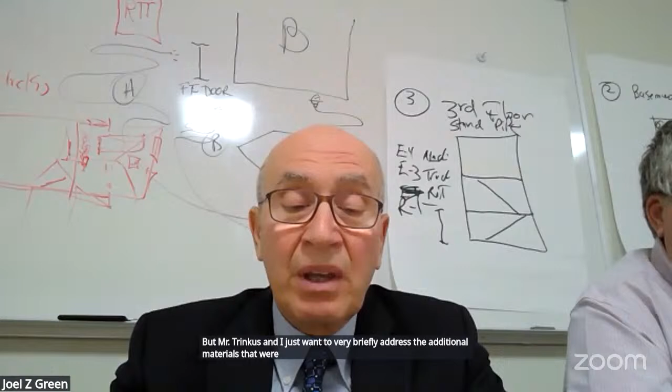Mr. Trinkus and I just want to very briefly address the additional materials that were submitted by the applicant. I'm going to have Mr. Trinkus address those comments now, and I'll just have some very brief comments after him, and we'll be happy to answer any questions. So I'm going to turn it over to Steve right now.

Good evening, Wetlands Commission. Steve Trinkus for the record. I'm a licensed professional engineer from Southbury, Connecticut, representing Mr. Green and his client. Really just a couple comments. One on Tatiana's memo, where she suggests that additional deep holes and percolation tests can be done as a condition of approval. In my professional opinion, that's an inappropriate approach to this because there are issues with the current proposal.

The proposed underground infiltration system has a couple test pits in that area. They are 6.5 to 7.5 feet below grade. However, the infiltration practice is between 11 and 15 feet below grade. The '24 DEP stormwater manual, which is considered a guideline—that is DEP's language—it is not cast in concrete, it is a guideline.

That is their language. However, for soil testing for infiltration practices, the test pits must be a minimum of 3 feet below the bottom of the system to prove there is no ledge or groundwater within the bottom of the system. With the system being 15 feet below grade at one point, you would need a test pit roughly 18 to 19 feet below grade. So we don't know if this system does provide the separation that is stated for infiltration practices within the '24 manual. Also, percolation tests are expressly prohibited for infiltration practices under the DEP manual.

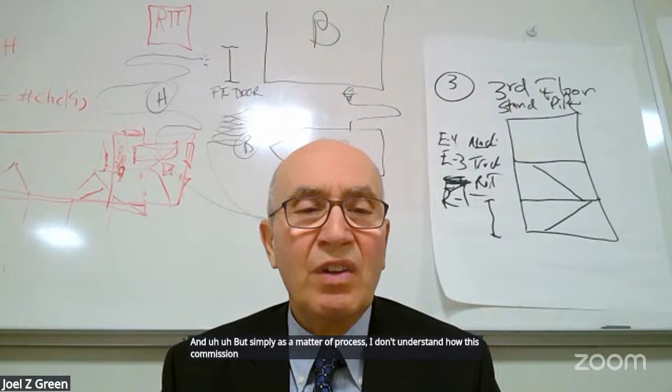And yet that's where we sit on the fourth night, where those results, and Mr. Trinkus has pointed out areas where the fundamental testing—it's not that hard, he identified two ways it can be done—and yet we're sitting here once again with the possibility. I know Attorney Knopf highlighted the good relationship he has with staff, and I'm sure that's true, but simply as a matter of process, I don't understand how this commission can delegate one of its essential functions to a department or to anyone else.

In terms of the findings this commission has to make—bear with me a moment—you have to make findings as to the environment, referring to section 10.2, criteria for decision. Amongst those findings are the environmental impact of the proposed regulated activity on wetlands or watercourses, including effects on the inland wetlands and watercourses' capacity, and it talks about various criteria to supply and protect surface and groundwater, control sediment, facilitate drainage, control pollution, and so forth.

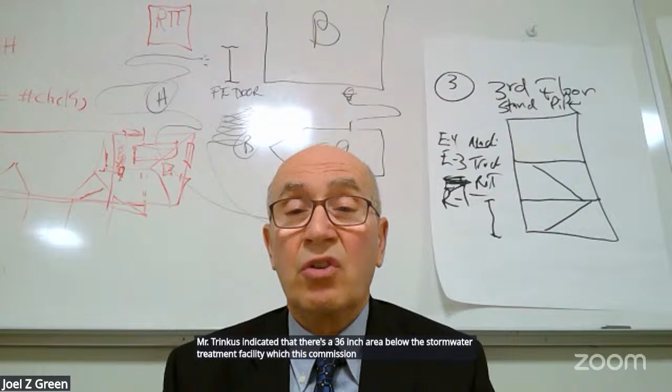But the big point is that all of these stormwater treatment methods depend on the quality of the soil. We had submitted the DEEP stormwater quality manual, and I think any engineer would tell you that you need to test those soils where that system is. Mr. Trinkus indicated there's a 36-inch area below the stormwater treatment facility, which this commission should understand in order to determine whether it will infiltrate as proposed.

So I'm just suggesting that this application is not ready to be acted on by this commission. As to the rest, we've made comments in the past, and you have Mr. Trinkus's letters and our petition to intervene. I certainly want to thank the commission for your generous patience and for hearing us. I don't know if you have questions for me.

Any questions or comments for Attorney Green? All right, Attorney Knopf, before I go to our town engineer, did you wish to have Luke respond to Mr. Trinkus's comments? No, frankly, I don't think we've heard a lot from Mr. Trinkus and a lot from Attorney Green.

I think our team has done a really wonderful job putting together the application and a robust stormwater treatment plan. We've heard from Mr. Trinkus that there's literally nothing we can do to satisfy him other than maybe converting the property back into a farm. So we're happy to do that as soon as his client decides to tear down Home Depot and plant his property as a farm, because he clearly identified there's literally nothing we can do that would satisfy his requirements for stormwater treatment.

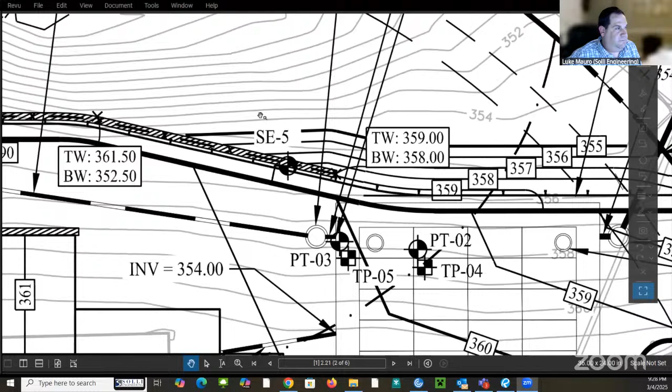I'm not sure I can add any dialogue, but I do have it up on the screen, and I'll just circle it. So you're good? Did Carmine find it? Yeah, right. All right, thank you, Luke. If we can take that back off so I can see the rest of the commission. Okay, Greg, go ahead.

I'm in a similar position as David. Both attorneys were very articulate, very professionally competent in their presentations over the weeks. It was interesting, the back and forth arguments, but the way I look at this, with wetlands scientists being consistent along the 111 area, we have no existing stormwater treatment on site right now. I'm leaning toward following our town staff opinions, and that's where I'm leaning on this. They're comfortable that this is a big improvement from what we have there right now. So I'm in support of it.

All right, other comments, questions? Mr. Chair, if I may interject. Go ahead. Attorney, I want to remind the commission that you're just discussing right now that there's no detriment to the environment for the intervener vote. So you need to have that vote. Once you conclude that discussion, then you will vote on the application as a whole. Okay, thank you. So are there any other comments on the environmental aspect of this application?